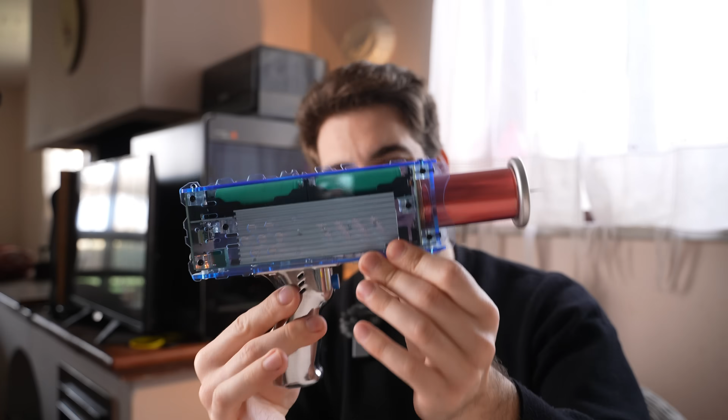Today I have a super cool project in mind because I got this portable Tesla coil from AliExpress. If I press the trigger it shoots 15 centimeter arcs. You can touch it, it's not painful, you can feel the sting, also the smell.

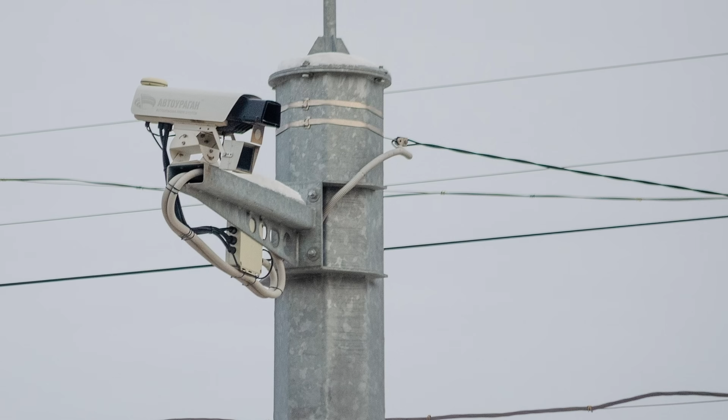I'm very curious to know what it does to electronics, especially those pieces of equipment placed way up on poles. To reach those, I will need to put this on a drone and figure out how to remote fire it.

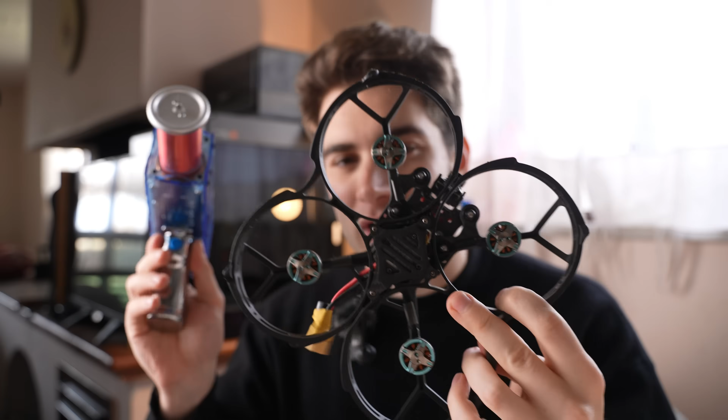All the drones I have are quite small, so I will need to design and print something bigger. And to achieve that, I'm gonna use the sponsor of today's video, Anycubic, with their new Kobra S1 Max 3D printer.

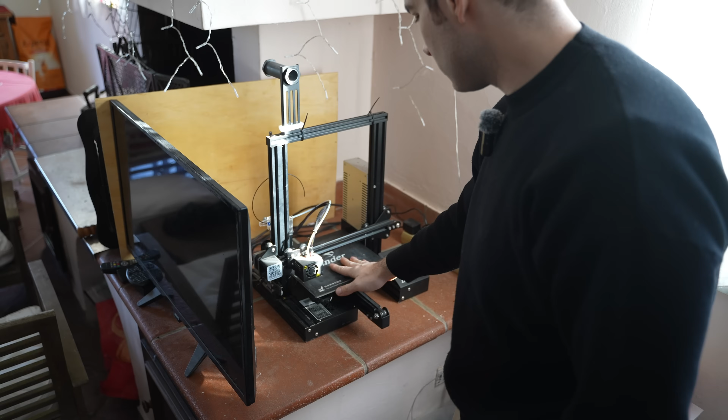In order to make this work, we need to solve two main issues. First is how to make it airborne, because this gun is 700 grams, it's quite heavy, so we will need a little bit of power. The second issue is how do I activate it once it's flying on a drone, because I cannot be there pressing the trigger, so we'll need to find a solution for that.

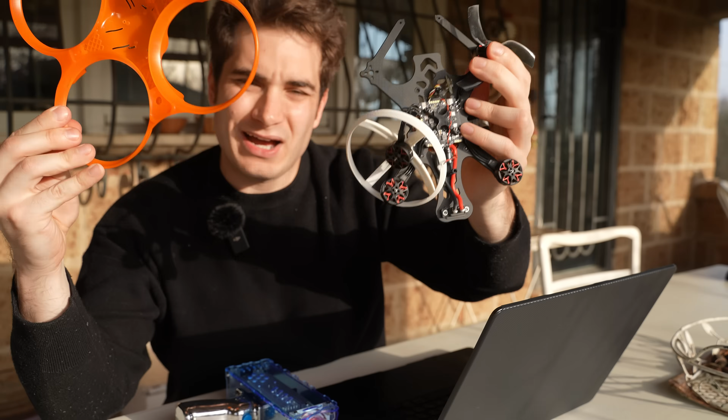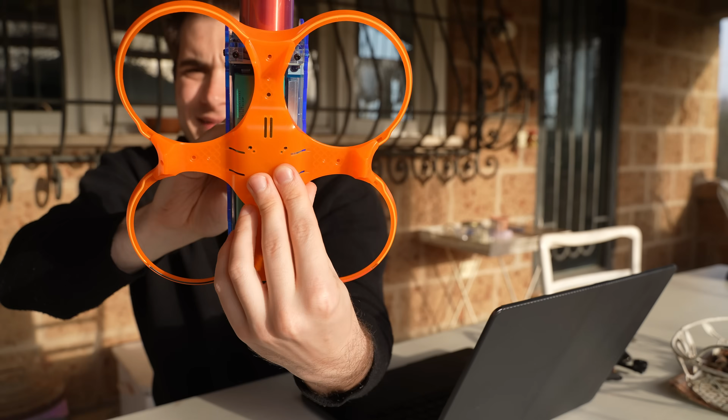I was looking into my old stuff and found this Axis Flying Cinewoop, which seems very nicely fit to make this fly, because it has 3.5 inch propellers, 6S power, and quite big motors. They should be able to push 1 kilo each, and theoretically should lift 700 grams, no problem. The drone is gonna look something like this, with the Tesla coil on top, and most probably I'm gonna put the battery on the bottom.

Let's fire up Fusion 360 and design this drone. First I will need to model a rough sketch of the Tesla coil. Let's sketch a very simple frame with the propellers outside of the Tesla coil area. And already it looks like a drone.

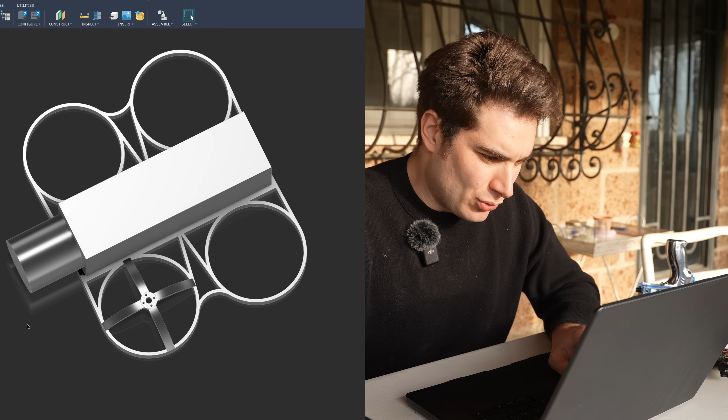Let's make the motor mount. We have to mirror this on all of the other arms. This is the top part of the frame with the holes to mount the flight controller. I also added some hexagons to reduce the amount of plastic, and some holes to mount the DJI VTX and camera mount in the front.

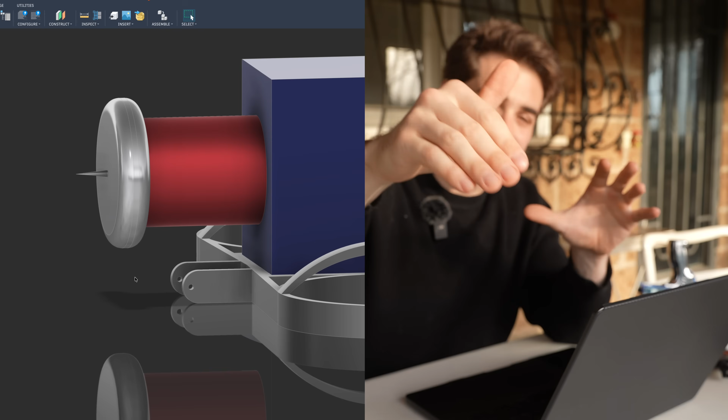I really do hope it works this way. I placed it far enough so it's gonna record the arcs, but not far enough forward that it takes them into the camera and possibly destroys it. Lastly, we need some bottom cover to strap the battery in. And this seems to me ready enough to print.

I didn't go with crazy duct geometries or anything, I kept it simple. Let's see if it prints nice.

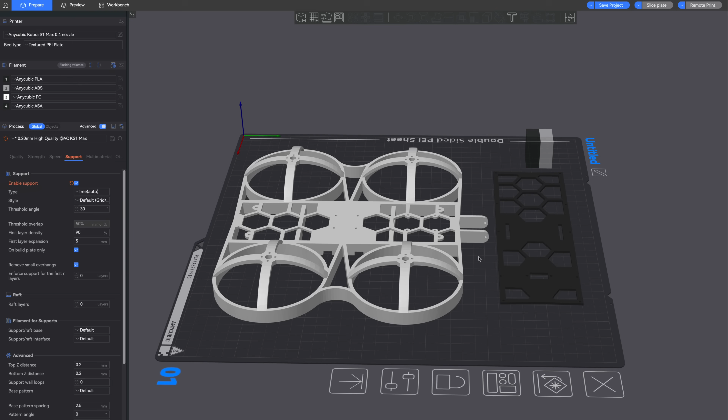I have loaded the model into the Anycubic slicer and I have a nice selection of materials. The bed is big enough that we can also print the bottom cover, even in a different material if we want, but I'm gonna print both in polycarbonate.

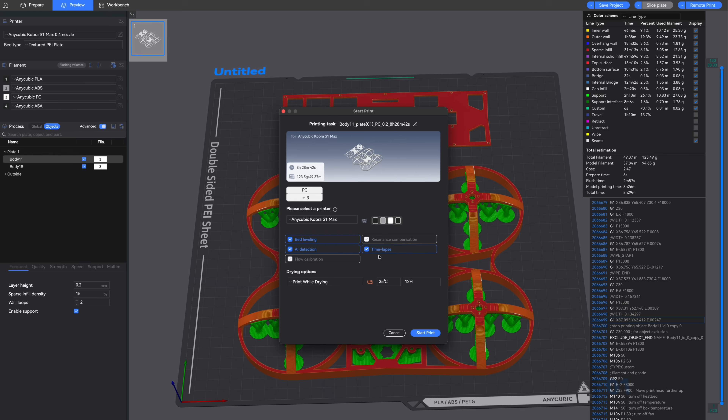The nice thing about this printer is that it's connected to the internet. Wherever you are, you can send print files straight to it from your computer, or even from the phone app. I'm gonna activate bed leveling before starting, AI detection so if something goes wrong the printer stops, and I'm also gonna record a nice time lapse for the video. You can also dry the filament while it's printing, which is pretty neat.

Before I start printing, let's talk a little bit about the specs of the printer. I have to say I've been pretty impressed with the unboxing and setup of this machine, because first of all it's very well packaged, but most importantly it's all pre-assembled. You don't need to do anything.

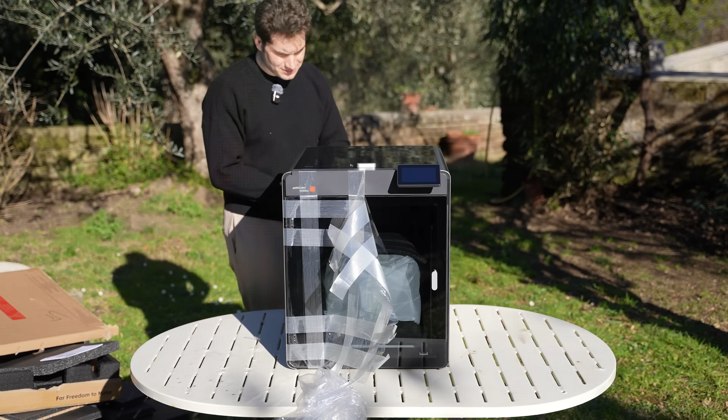If you get the combo version, you get the Ace 2 Pro inside the machine. You just open it, take it out, put it up, connect a couple of wires. The first time you turn it on it does an auto calibration thing, but in like 20 minutes you go from boxed to printing. It's super quick, very easy.

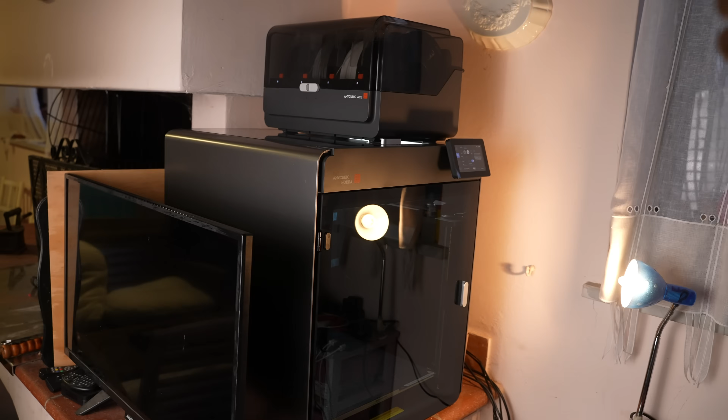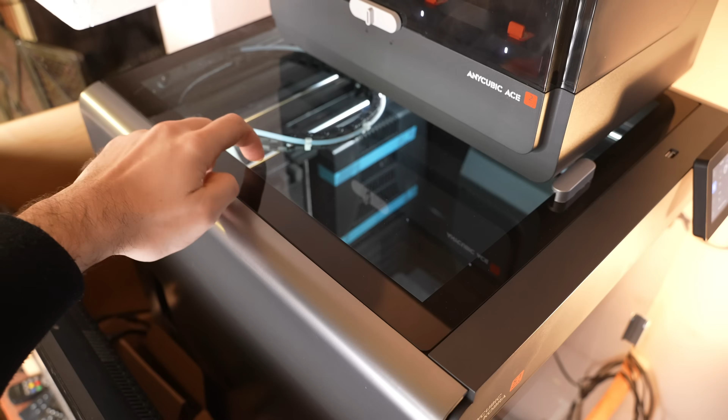The printer is quite big. I placed it behind my television, which is a 32-inch for reference. It looks super sleek and modern. The materials are great, you have a glass front panel and glass top hatch which you can raise. The internal frame and back panel are made of metal, and these side covers are actually plastic even if they look aluminum. The power cable and on-off button is at the back of the machine at the bottom.

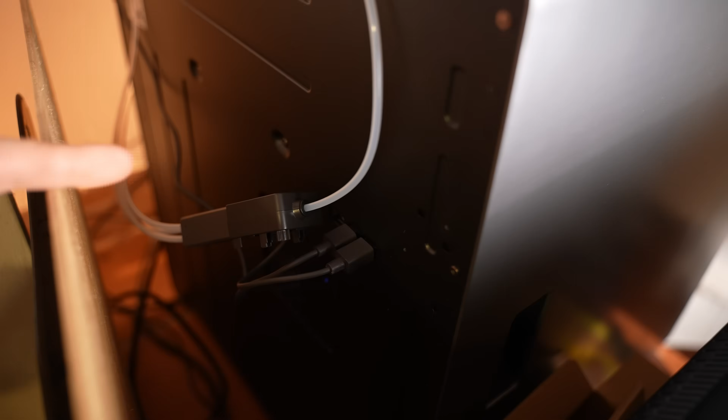Right at the top you have a couple of connectors for the Ace 2 Pro and the filament feeding tube. They also provide a filament spool holder that goes right at the left side of the machine.

In the front you have the LCD screen with touchscreen. It's tiltable and it's really useful to have. Also, it shows you what model you are printing. And it comes with a USB-A port at the top.

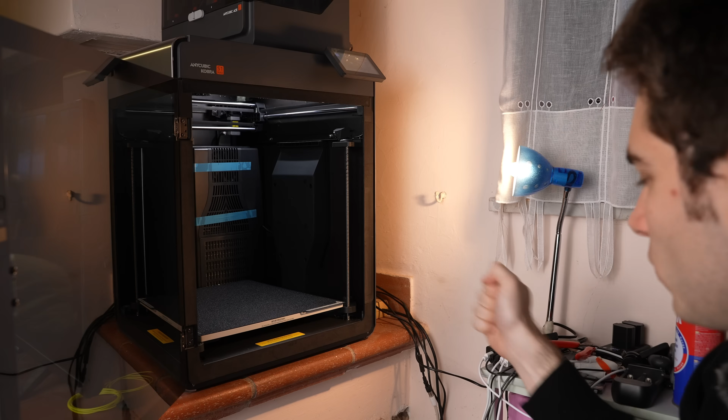The door opens toward the left side. This is the max opening you get. I wish it was reversible, so I would open this way. It's more comfortable for my situation, but it's no problem. You have a lot of insulating tape all around it, so air from the outside doesn't enter into the machine.

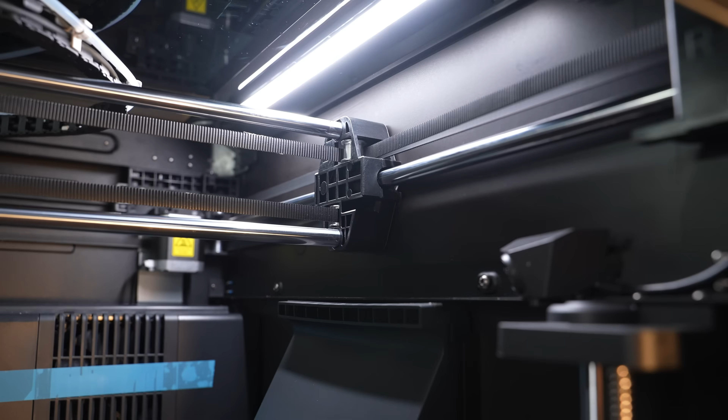The printing area of this machine is massive. You have 35 by 35 by 35 height, so you can really print big stuff. This printer uses a Core XY gantry, which makes it super fast. It can print up to 600 millimeters per second and accelerate up to 20,000. The bed Z-axis is moved by 3 linear actuators and 3 smooth rails, so it's super stable.

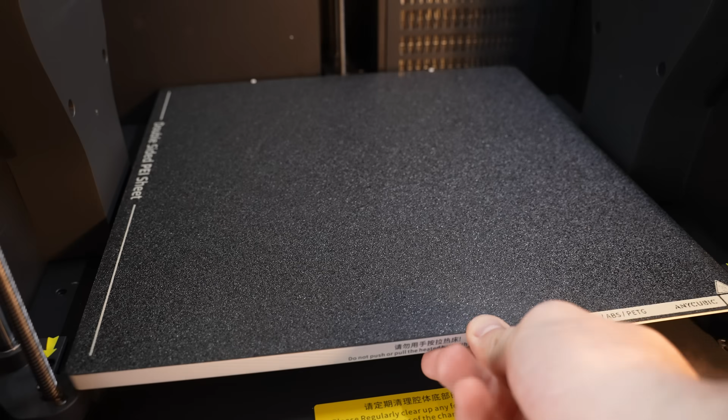The bed comes with this double-sided plate, which is magnetic, and it's super easy to slot back because it has 2 grooves. I did it one-handed.

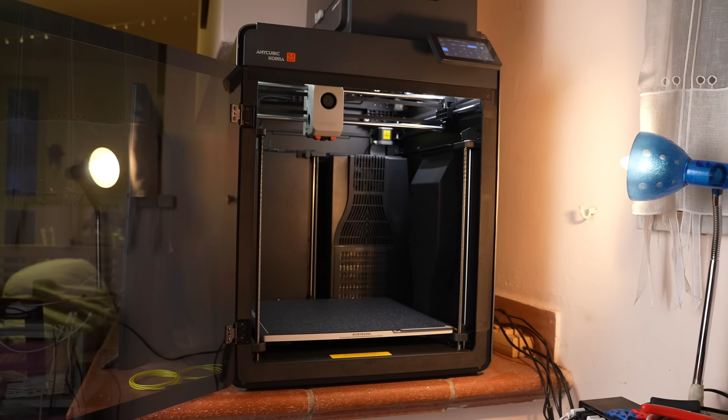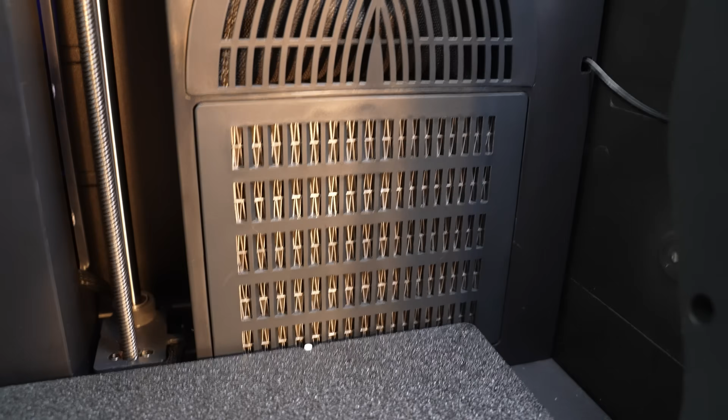This machine reaches very high temps, so you can print hard materials like ASA, polycarbonate, no problem. The hotbed reaches 120 degrees Celsius, so filaments stick and you get a very nice first layer. The air inside the chamber is heated up by this heater right here, which reaches 65 degrees. And also very cool, up top you have this fan with an active carbon filter, so it removes any odor the machine creates.

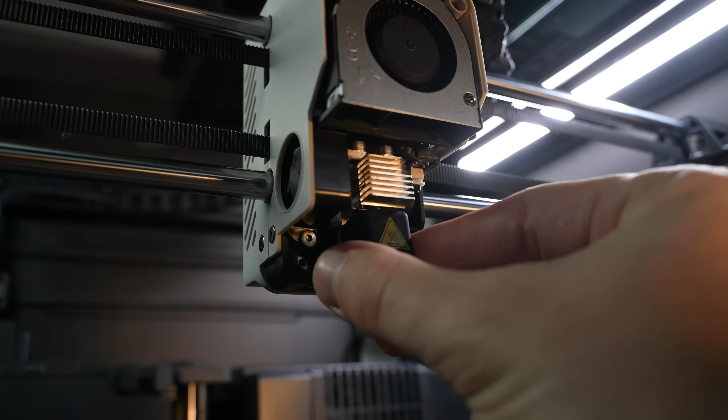And the hot end is a direct drive. It opens super easily and it reaches 350 degrees, which is a lot. And you can change nozzle very easy. They are hardened steel nozzles. You just open it and boom, you can exchange it with a different size one.

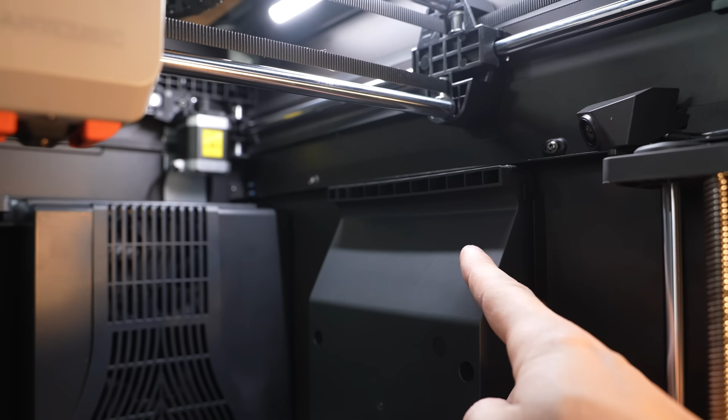It also comes with model cooling fans left and right, and the same goes with the interior lighting. And at the right side you have a wide angle camera, which you can use to monitor your printing from your phone or your computer when you are away. And also it has AI to auto-detect print failures.

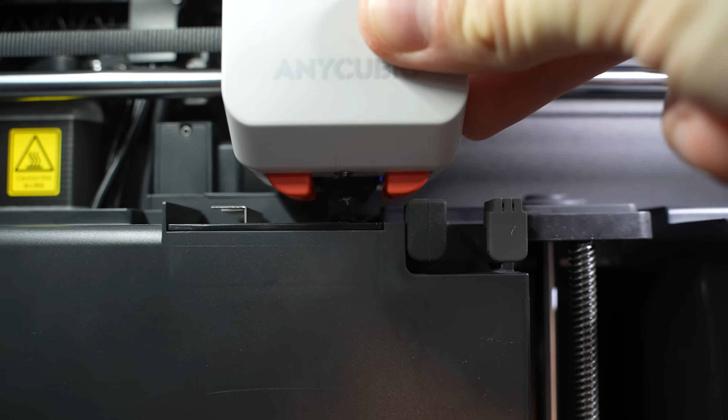And this at the back is a very clever system to clean the nozzle. When the hot end arrives, this metal hook cleans it, and then it goes on to these silicone brushes to further clean it. And all of the discarded material comes out from the side.

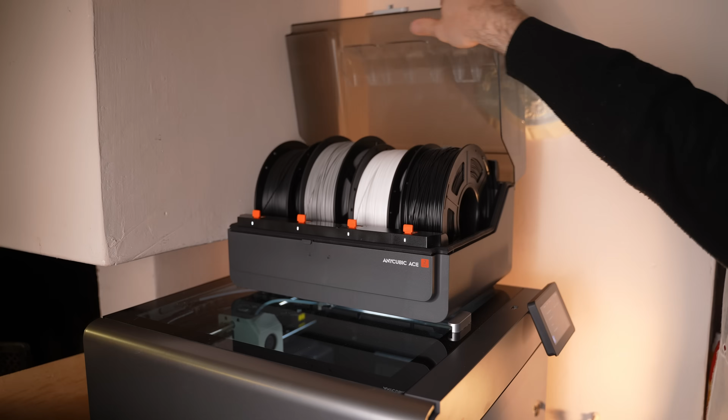In combo with this machine you can get the Ace 2 Pro, which is very nice because it has, of course, 4 slots for 4 different filaments, either different materials or different colors. You can also hook up to 4, and you can get 16 different color printing inside the same machine.

It has a rubber gasket all around it, so moist air doesn't enter and ruin your filaments. Also, you can hear it's actually working because it has an active dryer inside it that reaches 65 degrees. So when you close it, your filaments are nice, dry and toasty.

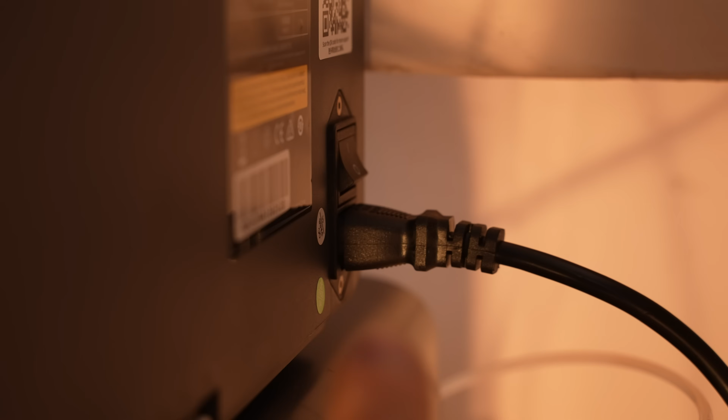This is the back. You get the connector to the printer, filament outputs and the power cord with the on-off switch, because it's actually pretty easy to detach and use other filaments external.

This is my first time printing polycarbonate, and just look how good that first layer is.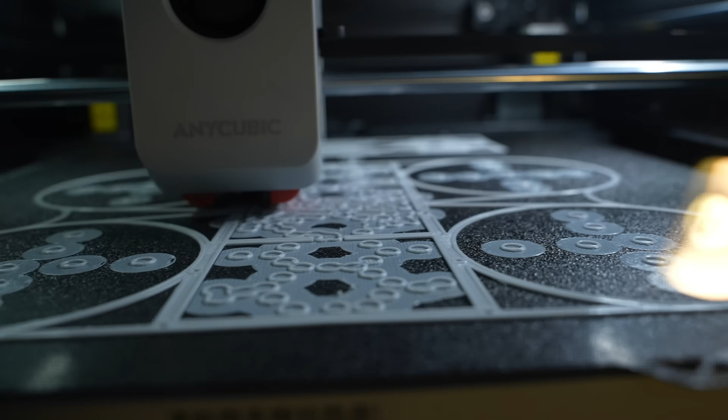And boom, everything is printed. I already cleaned the support material. It fits together nicely and it looks like it will be able to fly.

Time to transfer the electronics into it. The motor wires are a little bit too short, so I will need to put some extensions.

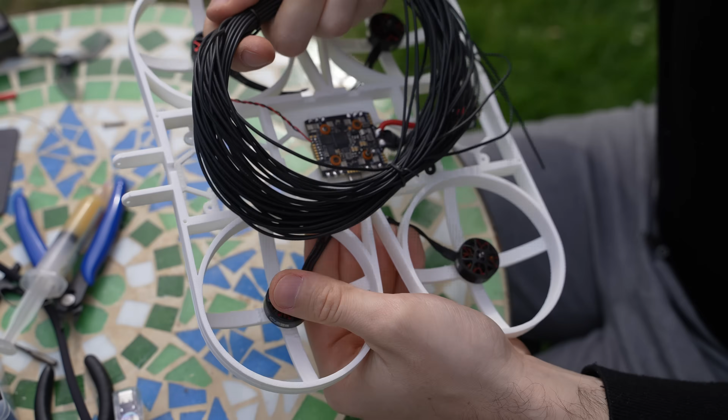For this drone I'm gonna use a DJI O4 Lite because it's less expensive and I don't want an O4 Pro to be zapped by the Tesla Coil. Also because it's very slim inside here, so the O4 doesn't fit. I'm gonna use this wide angle adapter so at least we get a little bit wider field of view.

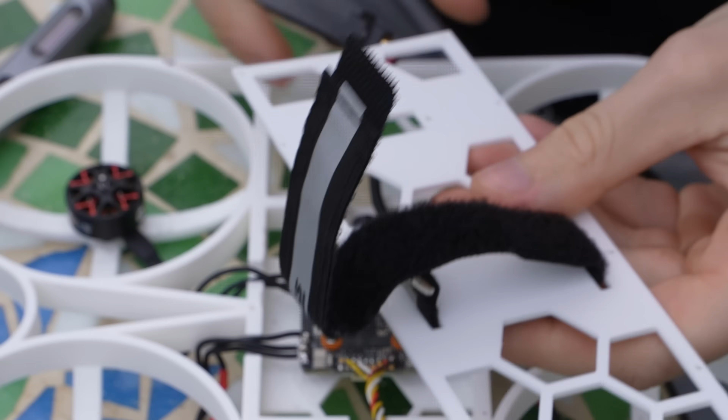Everything is wired up and it's time to close it. I put the battery strap on the bottom and I realized I made a mistake because the 6060 fits no problem here, but it's a little bit too tall and it hits the back spoke right here. So for now I'm just gonna freehand it like this, otherwise it does not close.

Okay, I guess it's enough screws. And boom, everything is ready for the first flight test. I'm gonna go without the Tesla coil first, just to see if it flies. But I'm going to take off from the ground without goggles first. Let's see if it even flies.

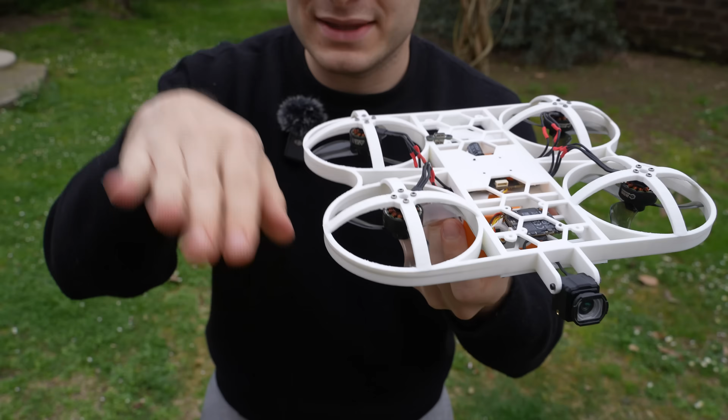Wow. Okay, maybe the whole gyroscope is messed up. And the gyroscope was upside down, so I just turned it 180 degrees roll and it should fly now. Okay, it flies.

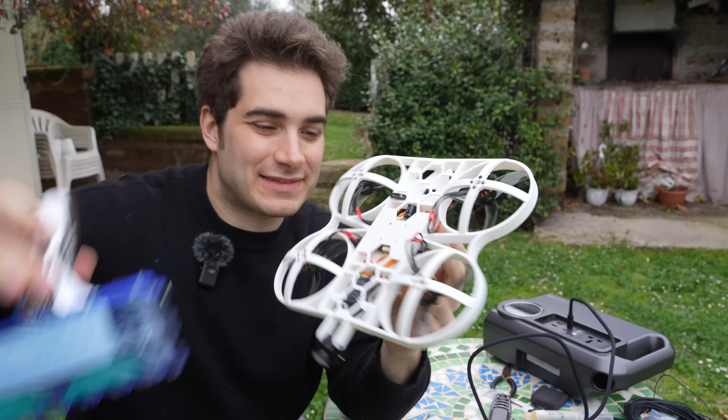Let's see if he can lift the whole weight of the Tesla coil. I have placed a couple of mounting holes right where the ones of the Tesla coil are. And boom!

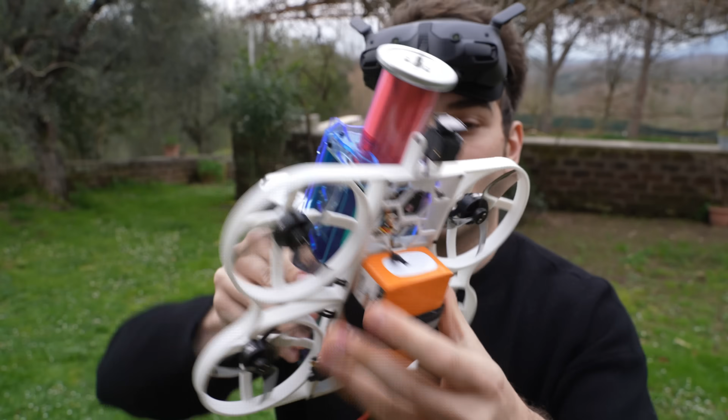Wish me luck. Wow! It's not one of the best flying drones I've ever flown, but I feel like it's impressive to be carrying 1 kilo of payload with these little propellers and motors. Of course, you're gonna hover at 50% throttle. The battery is not super happy, but it flies. So I guess I'm just gonna find a way to remote trigger it.

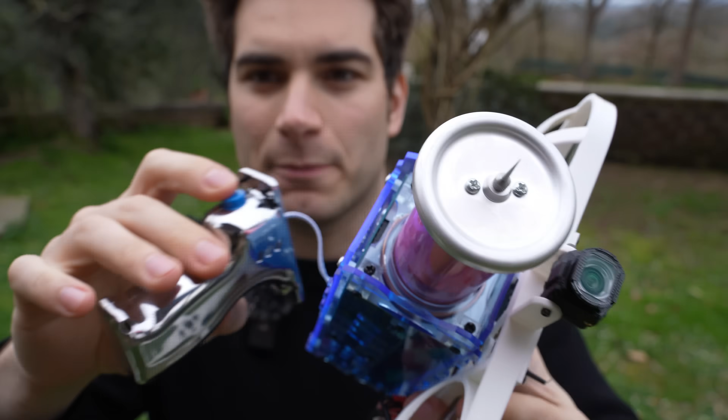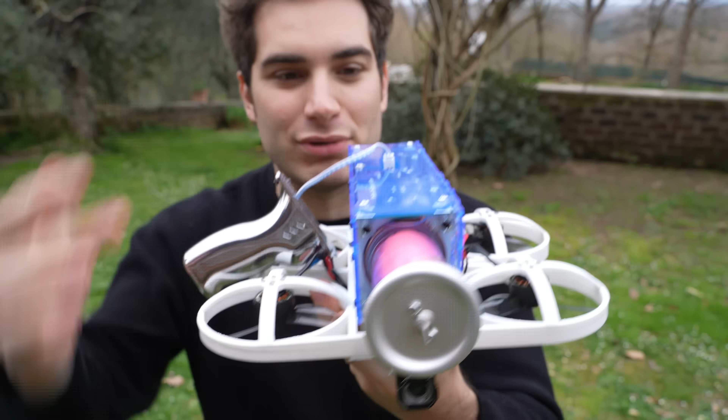It seems that very easily the trigger is just a switch. When you press it, it fires, but also the plastic of the handle is metal plated because your body acts as a ground. So this thing seems to have to be grounded, because if I fire it while it's in the air, it's not grounded. Maybe I'm gonna attach a kind of long wire sticking from the bottom so we have a little bit more grounding in the air.

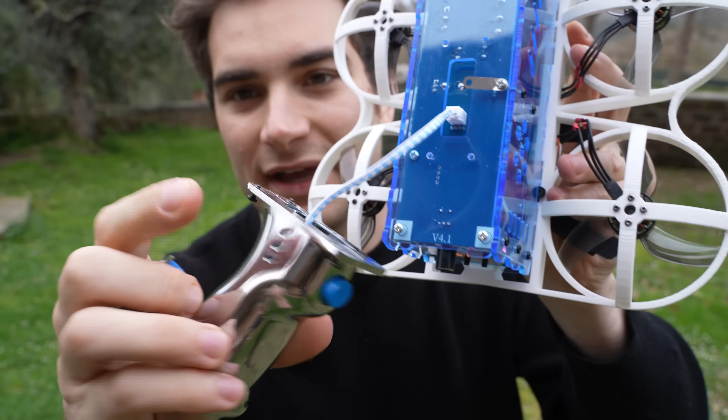In order to remote fire, I'm gonna try hooking this to an electromagnetic switch made for Arduino, but it should communicate somehow with the flight controller of the drone. When I press a switch on my radio, this thing activates, it bridges these 2 points, and theoretically it should act as the same thing as the finger closing this connection. I'm gonna try and see if it works.

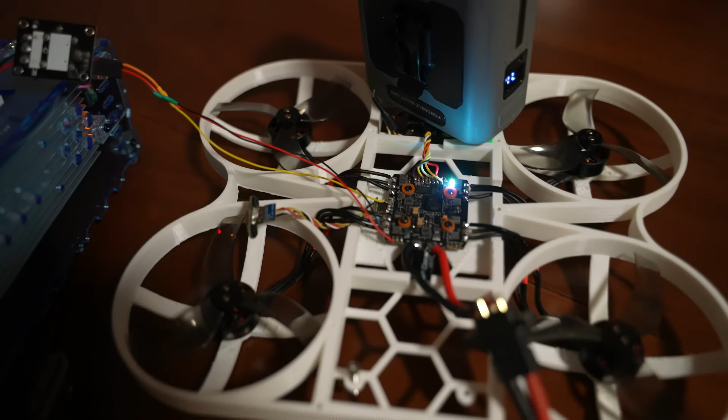As you can see from outdoors, it's actually nighttime, 11 p.m. I have spent so many hours trying to make this thing work. I still have a headache. And boom, I finally made it. I have connected the relay to the Tesla coil and it's activated by a switch on my radio. Look, I press it. Boom.

This thing is menacing now. Look at the arcs. I found that if I put a wire and it's grounded, the arc is much bigger. And this thing is gonna be free floating from the drone. I hope it still works even without being connected to the ground. But look at these arcs. Boom.

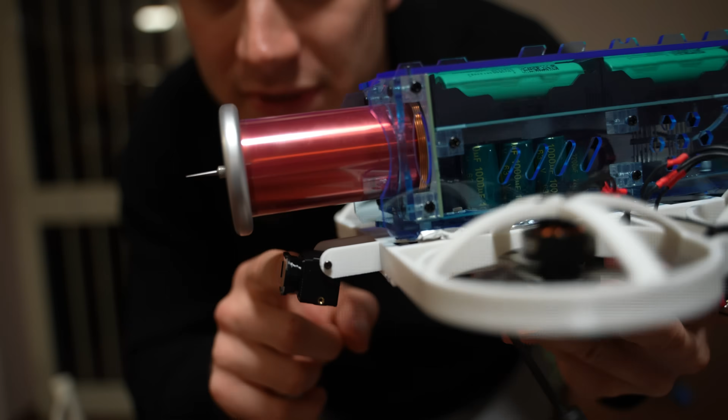Now I just have to assemble it all together and see how it flies. I've tried wrapping some aluminum tape all around the camera to act as a Faraday cage, but it doesn't work. Actually, the spark strikes the camera directly and it's even worse somehow. What I'm thinking is that probably the camera is just too close to the coil and is getting EMP'd. So what I'm gonna try doing is raise the Tesla coil a little bit so we have more distance.

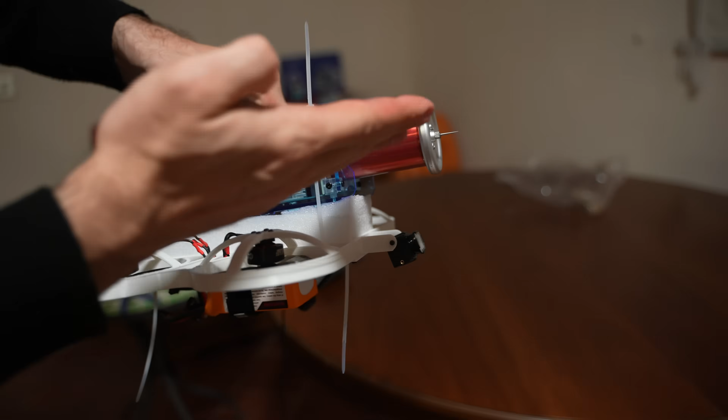Luckily it doesn't EMP anymore. This is kind of the best I could come up with. I put a little bit of styrofoam on the bottom so we have a little bit of an angle and some distance between the camera and the coil. Gonna turn it on and I pray that it works. Okay, still a little bit of interference, but it's working. Nice, we got it, it's ready to fly.

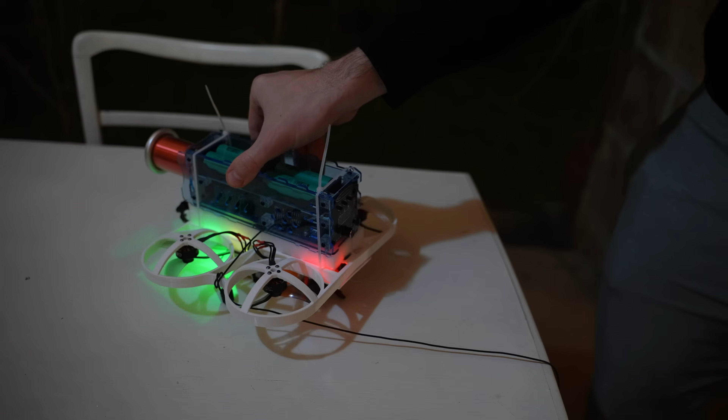Finally, it's time to properly test it, flying and shooting arcs. I don't fully trust it because I've seen that the signal can be EMP'd, so I'm gonna fly over the grass. I also put a longer antenna on the bottom, so it's dangling and is as far as possible from the Tesla coil. So let's turn it on. It's a little bit janky. Turning on the Tesla coil.

Okay, it's fully flying. Boom! Oh no! Oh no! The camera signal went away still, but at least we got a little bit of flying going on. Okay, we got the signal back. Let's try flying again. I have to be very careful because I don't want the drone to drop. Also it's not recording very well, because every time I shoot the Tesla coil it stops recording. I am EMPing my camera, it looks like.

Also, you may notice that the sparks are much bigger when this ground wire is touching the ground. As soon as I lift the drone up, they become much smaller. I don't know how to prevent this. I don't want the drone to be carrying a very long wire to be always grounded.

And that's all for today. I'm super happy this thing flies and shoots arcs, but I feel like before trying any EMPing other stuff, I need to fix the fact that it's EMPing itself, and this camera is not usable. It's freezing constantly and really is really sketchy to fly. So if you have ideas, please help me. I want to make an updated video. I need to fix this issue first, also how to improve this situation right here, and then I'm gonna try this thing against other objects because I'm very curious on what it can do. If you have ideas on how to make the arcs longer or to modify, to create something, I am very curious because I'm pretty ignorant on this electronic stuff and just eyeballing stuff, but still I am pretty excited with the result.